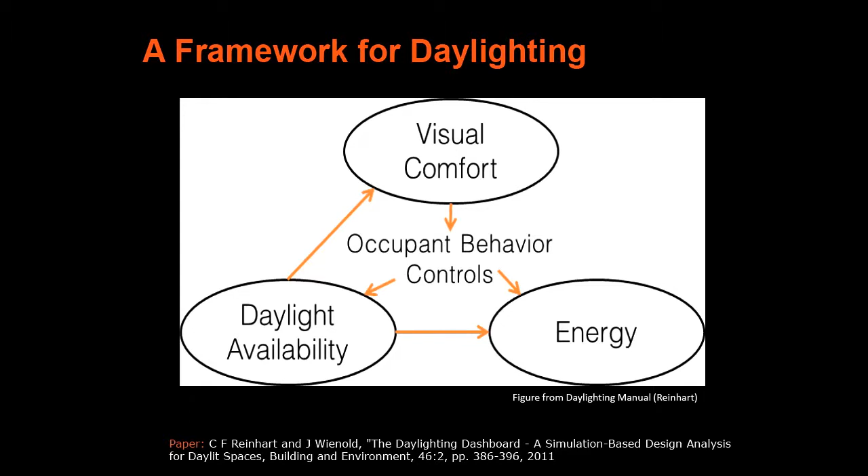So how can this look? Well, there are various levels of how this can happen.

There's manual control—this is obviously the European solution: opening and closing windows, turning on the lights, changing the shading systems. High occupant satisfaction if it works, but very difficult to model.

Then you can have automated blinds—we were in the epitome of the automated building last time. Basically every single blind seems to adjust independently depending on direct sunlight shining on the window, and it seems to work, believe it or not—only in Switzerland.

And then you have architectural control. This is, of course, great—buildings like the New York Public Library, where there are no external controls, and still people are really constrained.

Once you're in a library, you sit at your workplace and can't really move. They manage, with these big windows on both sides, never to let the lighting into the space become disruptive. It's a wonderful example that's architecturally inspiring.

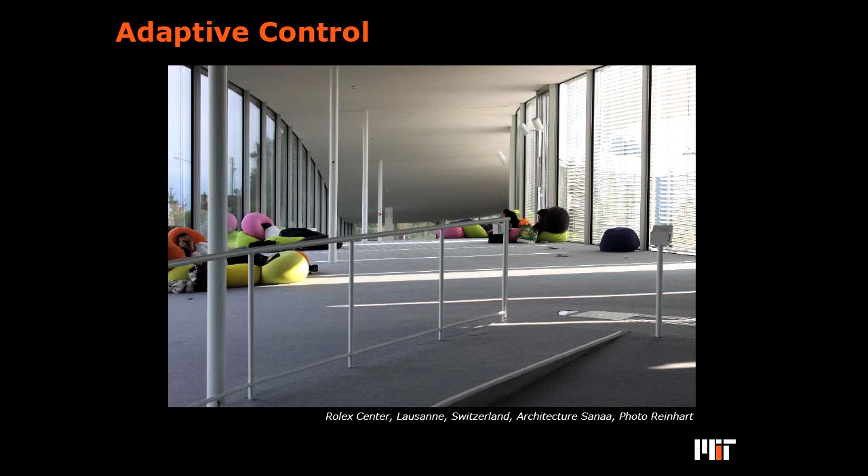Then there's the other extreme—again back to Switzerland—where we take out the walls, take out the furniture, everybody gets a beanbag, and you pick your spot to sit and work, and that works too.

So when you want to put this into practice, how do you look at daylight availability, glare, and energy? I'll give you a simple example of how we do this.

Say you have a south-facing office and want to decide whether to use blinds or not, or instead of blinds, use more complex controls.

The first thing you can do is run an annual daylight availability map to see how much daylight you have within the space. If I don't have any blinds, then three-quarters of my space is daylit.

If I have blinds, I lose some of that daylight, so the argument would be: no blinds.

But then you run an annual glare analysis and see this temporal map based on daylight glare probability, from the first of January to the end of December, by time of day.

If you don't have blinds with such a big window, most of the year when the sun isn't too high in the sky, people experience glare. So that obviously doesn't work—we need some blinds.

This is really where this type of analysis starts changing design. You see that for half of the year the blinds are closed in a case like this. This basically tells you the story of daylight within the space—you can't see out for most of the year, so the whole big window becomes moot and pointless. This is when you see people changing their designs.

Of course, the last part is once you know what goes on in the space, you can do an energy analysis. Loads are really boring usually, so you look at costs or carbon emissions, depending if you're in the US or Europe.

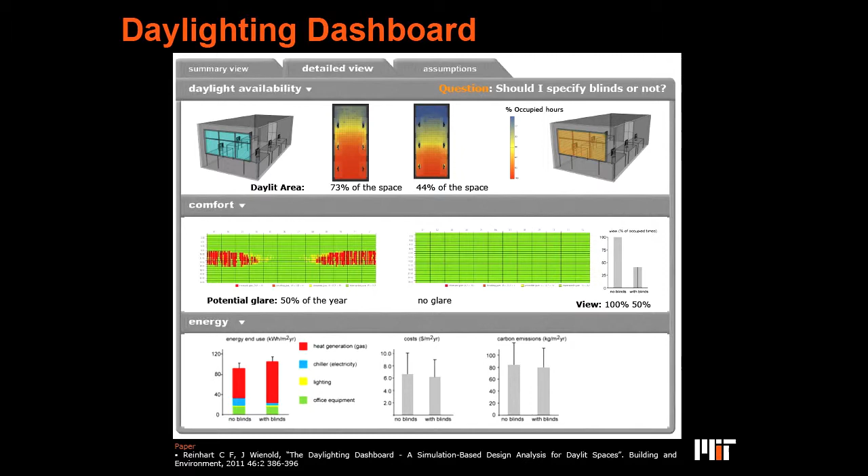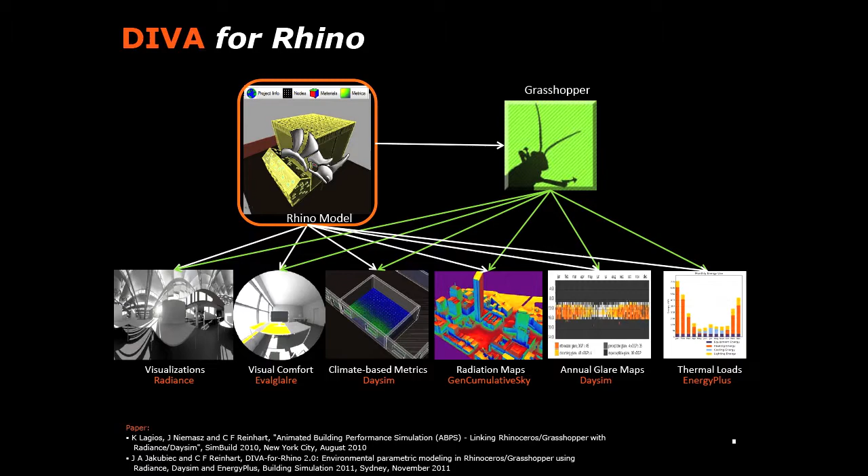The simulation environment we're using for this is a plugin called DIVA for Rhino, and you can use it parametrically as well. As a tie-in to one of the last presentations yesterday, students at MIT in their first year now learn it's very simple to do parametric analysis, link it to Galapagos—a genetic algorithm—and get these very complicated forms, which might be your optimum point.

With this little study—this is Elliot Glassman's work—we wanted to show in how far this deterministic thinking, this idea of 'the optimum way,' actually affects how the buildings look as a result. We wanted to show that this is often really unresolved, how that works.

So we used these boxes and said, okay, I'm optimizing for insulation levels, window-to-wall ratio, and overhang. What's my best solution for cost or for carbon? But then we also changed the climate.

We used today's climate, then climate in 2050, 2080. What you see is that this climate-optimized building changes over time. At the beginning you might have an R40 and a smaller overhang, and that overhang changes over time—your R-value changes as well.

So the main point out of this is it's very difficult for us to decide what is an optimum point, because do I optimize my building for today, or do I optimize it for 2080? But then, of course, I have uncertainty because I don't really know what the climate in 2080 is, and that leads us to different results.

So I think ultimately that shows you still have to have strong design, and you have to decide for yourself. As a designer, you have to say 'I want to optimize for cost,' and be aware of this. There's often this fear that the computer takes over design for you, but this shows there's a high level of arbitrariness in what you actually pick as your performance metric.

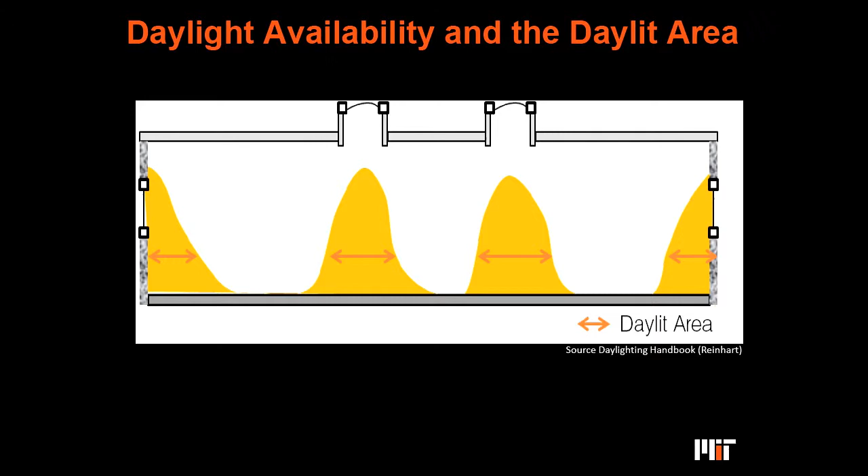So daylight availability—that's a study we've done. Why do you do a daylight simulation? You want to know where the daylit area ends. It's really trivial, of course—my six-year-old son knows that where the opening in the facade is, is where the daylight is—but we want to be able to say, well, this part of the building is daylit and this is not. So how do we make this distinction?

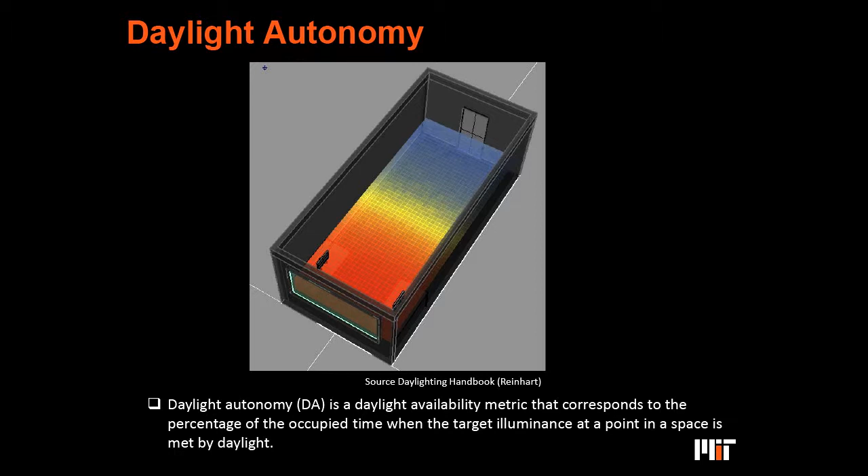Using the metric that Lisa introduced yesterday, an annual daylight availability metric, we can say: what's the percentage of occupied times when I meet a certain level? Depending on what that level is—if you want your target level 90% of the time, or more or less often—you get deeper and deeper into the building.

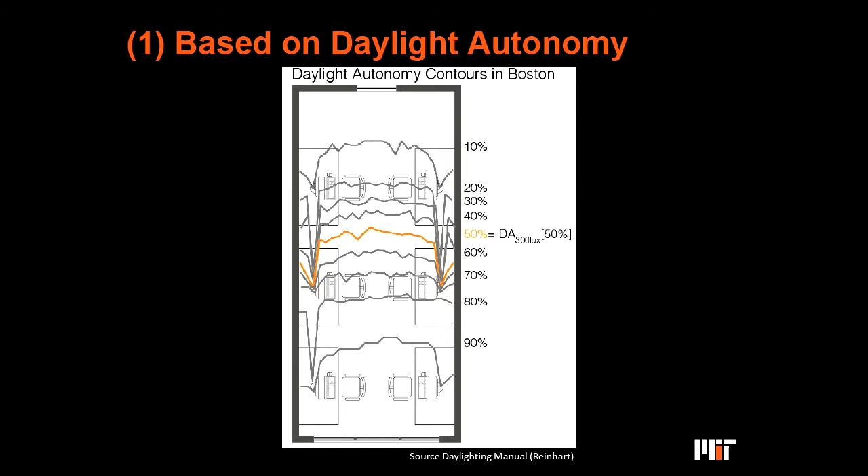Based on matching to 61 spaces, the IESNA committee determined that 50% daylight autonomy would be a good level. So this orange line—now magically the computer tells you, north of it it's non-daylit, here it's daylit. I wanted to see in how far that, what the computer and some daylighting geeks tell us, matches how people actually experience places.

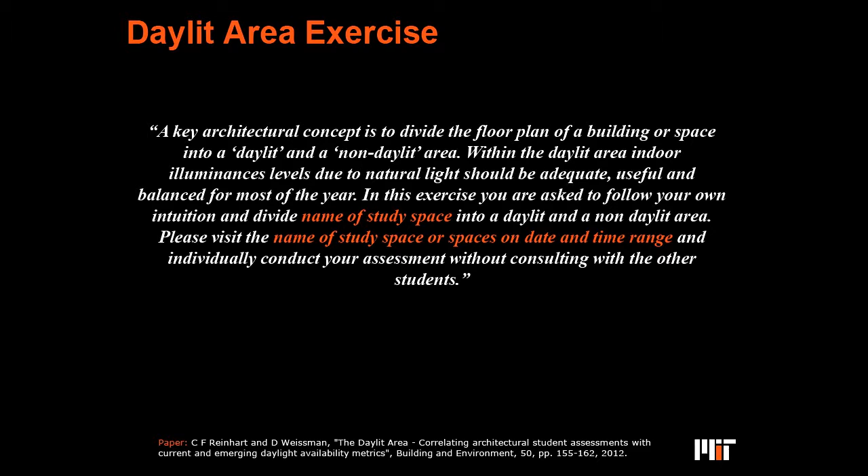So we started first at Harvard to do this little daylight area exercise. It's very simple: for students, before they learn anything about lighting, we take them into a space that's partially daylit, give them a floor plan, and just say, draw the line where you think the daylighting ends. The first time we did that was in the Carpenter Center from Le Corbusier, a north-facing studio space. So everybody got a floor plan here.

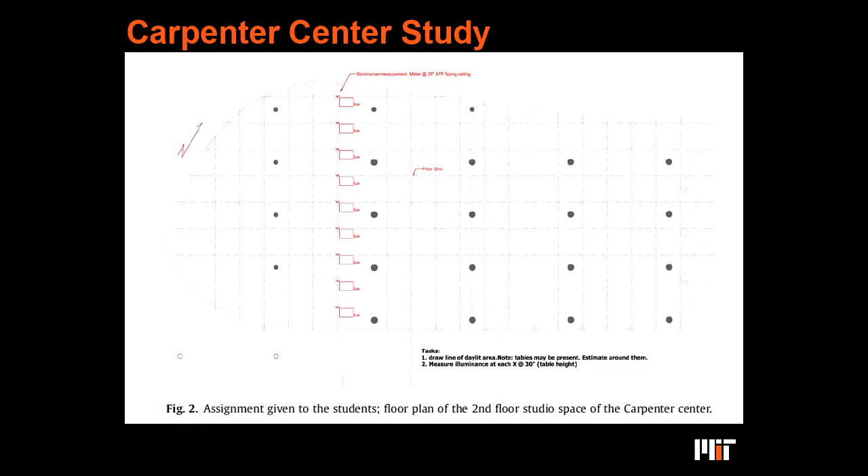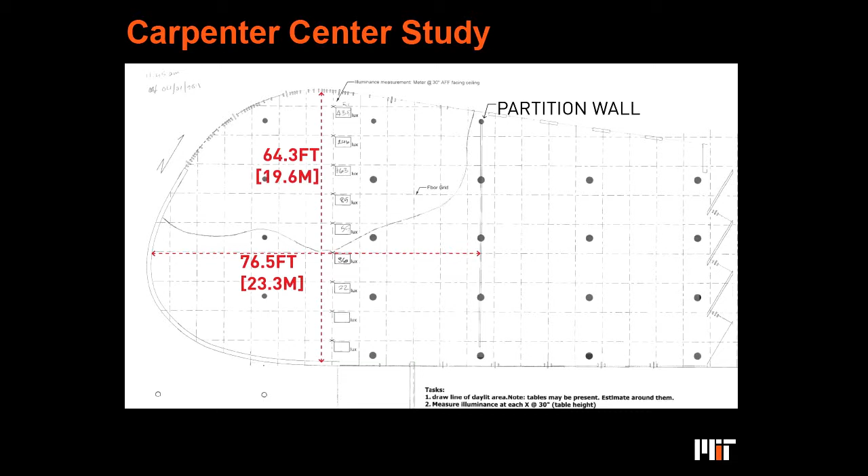Here are the windows, so the light comes in from here, and then the students just draw the line here. So this student drew the line here. If you do that for a lot of students, you get a lot of lines. So this is our mean line, basically, that we say this is what the occupant said, how deep the daylight penetrates.

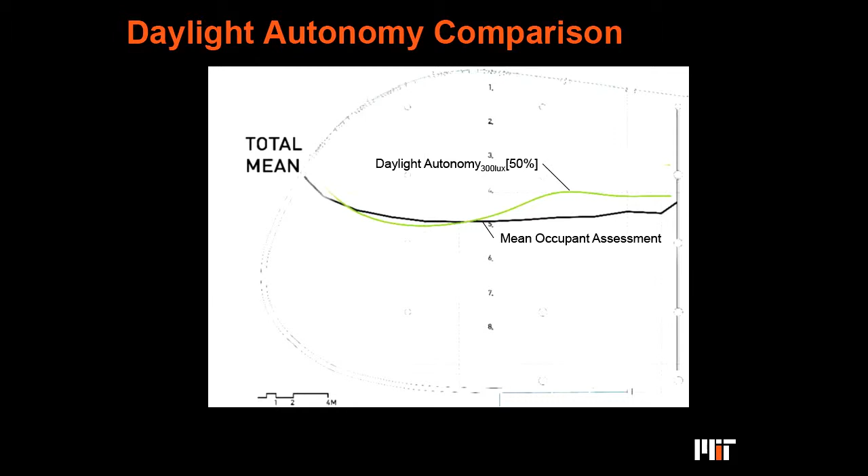And when we compare that to the daylighting metric, we actually got really close. So in this case, we were lucky, so to speak, that IESNA matched very well for one space what we were predicting. So great, quickly write a paper as long as it's still fresh. And so on one hand, we said that's encouraging. On the other hand, I would really say that's surprising this works at all, because we have people looking in the space and they see luminances, yet we do an annual illuminance calculation. It's in a way surprising how that could match at all.

But it worked, nice. So then we tried to do it again. This is our Lorax project. So we worked with several schools of architecture and asked them to repeat the same type of exercise. So they all did this exercise, sent us photos of their spaces, their CAD models, student responses, and so forth.

And these are the schools that participated so far. So we have 12 schools, and we've done most of the simulation, but it's still in process. So this is what we got, some preliminary results.

Well, first where I wanted to go is to say for design, this absolute line I think is a bit disruptive to say daylit, non-daylit. This is really not how we think, since there's a subjective component in there as well.

So instead, we basically said, okay, let's do a voting scheme. If three-quarters of people say for a certain area within a space this is daylit, then this is really daylit. There are always 25% that you can never satisfy. And then there's this transition space. So if one-quarter to three-quarters say it's daylit, then there's some merit to it, and we call that a partially daylit area, and less than 25% is just a lost case.

And now we convert that into daylight autonomy. So this is the IESNA metric for 300 lux, 50%. And here we say, well, if it's 150 lux as a minimum level, this is kind of our transition space. And we wanted to see how well this works.

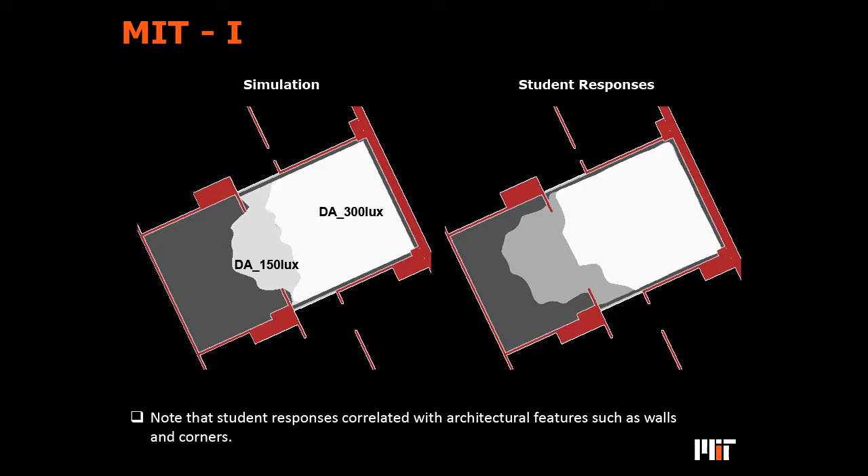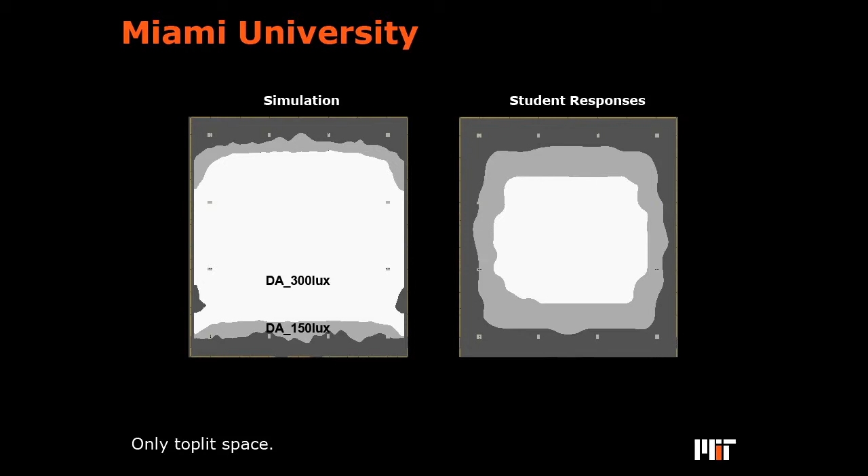This space didn't work well at all. This was in Brazil, Solange Maria Leder worked with us there. It's a circular building, so it's this building here, top floor. And here it really might be that this concept collapses because people stand in the middle and they see the luminances, and they don't really see this illuminance that we are modeling actually.

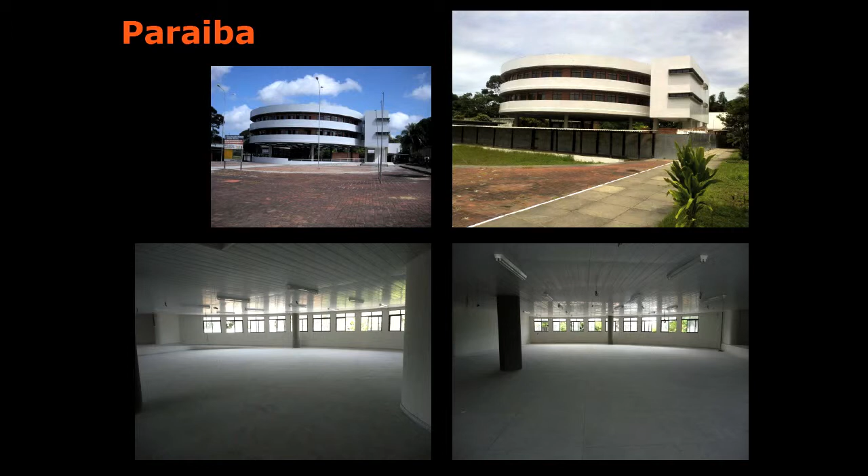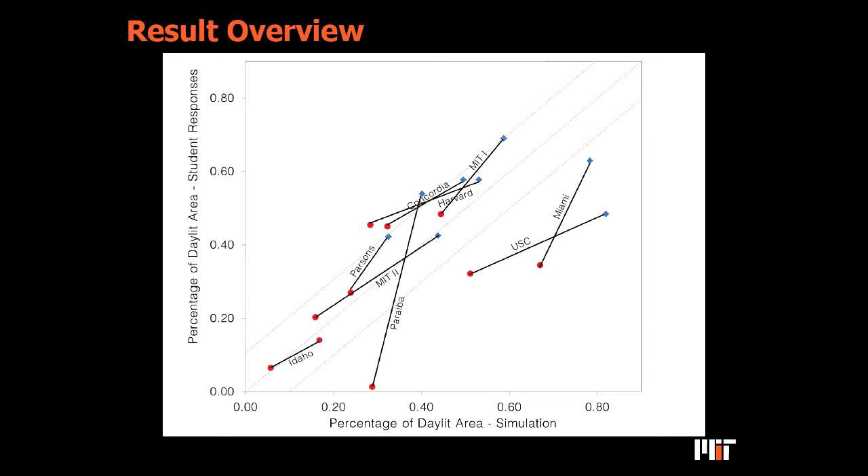But if you look at it, we can actually mostly say within 10% how big the daylit area of the space is. And that's very good, because this is the kind of thing that metric systems might want to have. So we can, within 10%, predict how much of a building will be daylit according to that. So this is where we are with this study so far. I think it's pretty encouraging right now, and it seems promising for a rating system.

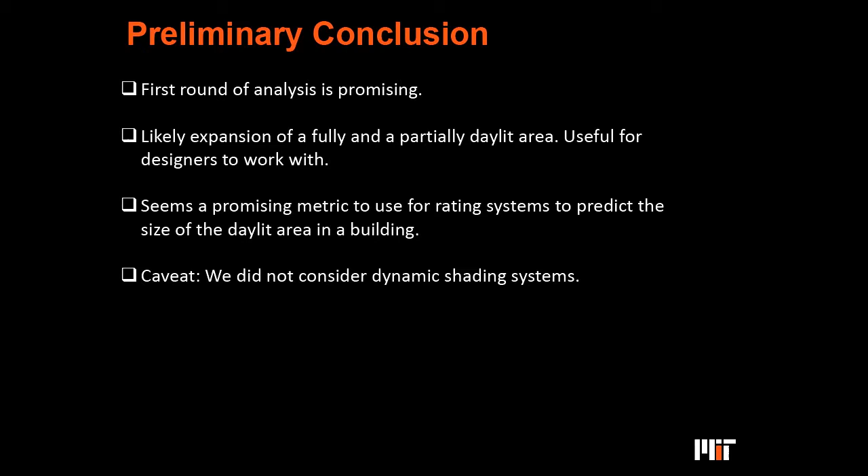As a caveat, we didn't consider dynamic shading systems, but mostly these spaces didn't have any. So a little more on glare analysis, and I rushed through that. So basically, all the researchers know that this is old work from 10 years ago from two people in this room, Jan Wienold and Jens Christoffersen, who introduced this daylight glare probability, which is an algorithm that you run on a scene, either a high dynamic range photograph or a simulation, that predicts the likelihood of people experiencing glare.

The thing to remember, it's based on two concepts. It's based on the idea of vertical eye illuminance, similar to the work of Myriam Aries, so how much light you get in your eye, plus a contrast ratio. So how much contrast do you have within the field of view?

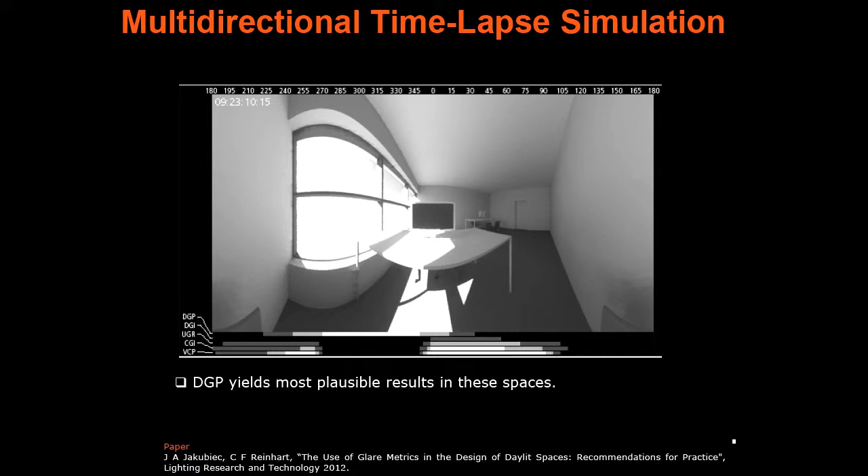So the first thing, we just compared this to all the other metrics that were out there. That's again a little older, where we basically for the side-lit space said, well, depending on which way you look, where do you experience glare? Here we found that daylight glare probability detects the window as the culprit, whereas all the other metrics think the glare's in the corner due to the contrast ratios. So this seems to be the only metric that yields something plausible.

What we did next, because we want to use this concept for simulation practice, we said, well, how do people behave? If you would be in a space like this, if you stoically look forward, then you will experience glare pretty often within a year. But then we said, well, if we allow people to move around, say we have better furniture layout, of course, if you look that way and you experience glare, well, don't look that way, right? That's how we behave in reality.

So once you start introducing this, you see how you can get rid of a lot of glare. So if you look constantly forward in this space, you get glare for most of the year. Once you allow this adaptive freedom, you get glare solved a lot more. So that was the concept.

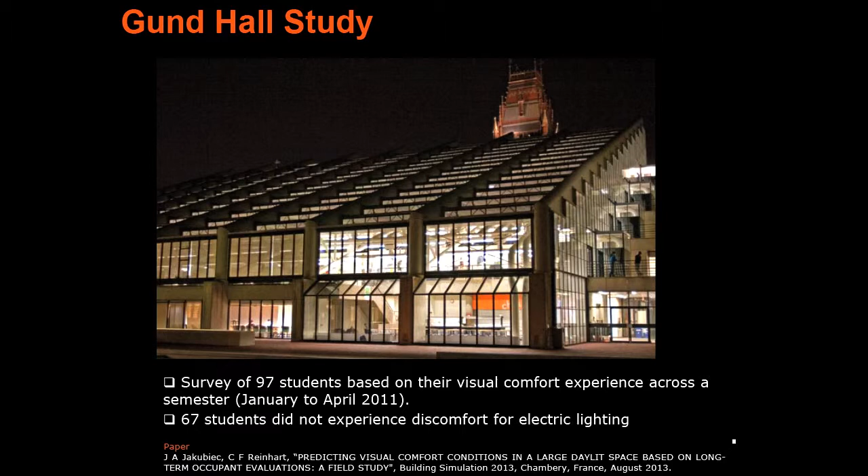5 minutes, oh God. So this was the concept, and what we tried to do then is test it in an actual field study. So we used Gund Hall in 2011, and there are about 500 students that sit on 5 levels in this big glass box, basically. And we promised them coffee in exchange for their opinion of their workspace. And we got 100 responses back, and about 30 of the students had problems with the electric lighting due to glare. We took that out because we didn't want to consider that. So we looked at 67 student responses.

This is our Radiance model of the whole space. So we knew exactly where a student was sitting. So we basically tried to map what students said about their space with simulations. And what we found when we used daylight glare probability annually by itself, that didn't work very well.

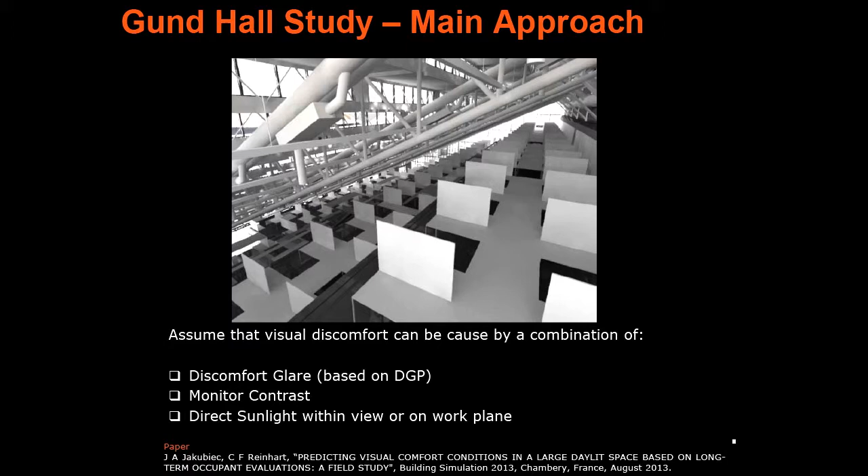So after a while, we said, okay, glare can be multiple things. It can be DGP, discomfort glare. It's monitor contrast, so even if I don't have discomfort glare, if I look at my monitor and can't see, that's a problem obviously as well. And it can be direct sunlight near the workspace. So when we used all 3 of them together, we actually got some good results.

So these are some very cool maps from Alstan Jakubiec, who is a doctoral student at MIT. So here you see the 5 different levels. And wherever it's gray, they're basically overlapping levels. And it's a pretty complicated, rich graph. So the inside color always tells you if a student in the morning, noon, or afternoon said how he felt between comfortable and glary. And then the outside is always our simulation results. So when the colors match, we predicted it right.

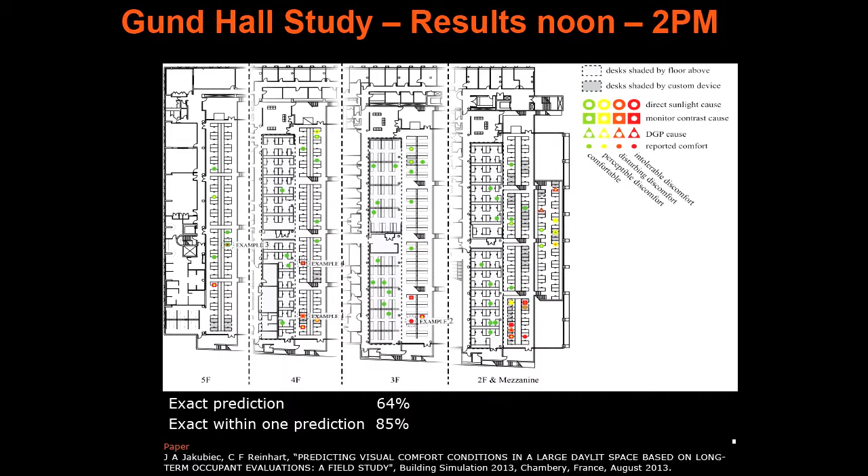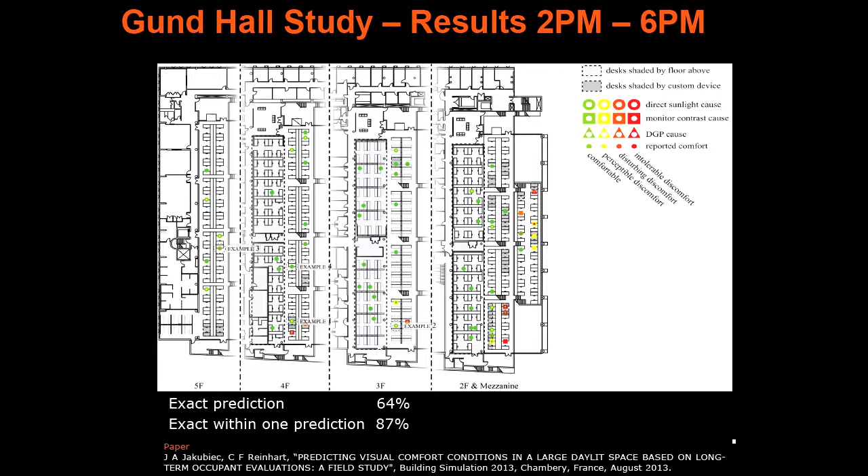And basically, in this case, in the morning, the exact prediction we managed in 40% of the cases. But since there's a big subjective component, we said, well, we are happy enough if we are within 1. If somebody says it's intolerable and we say, well, it's disturbing, that's close enough. So in that case, we would get within 70% of the evaluations. And for the noon case, we get 85% of the results right. And in the afternoon, we get 87% of the results right. So I think this is really a step forward in our ability to predict discomfort glare within spaces.

And that's the last part. I have 3 minutes. So urban modeling, I really wanted to show where we are going next. So we developed basically a DIVA for the city, and you can download that here, urban modeling.

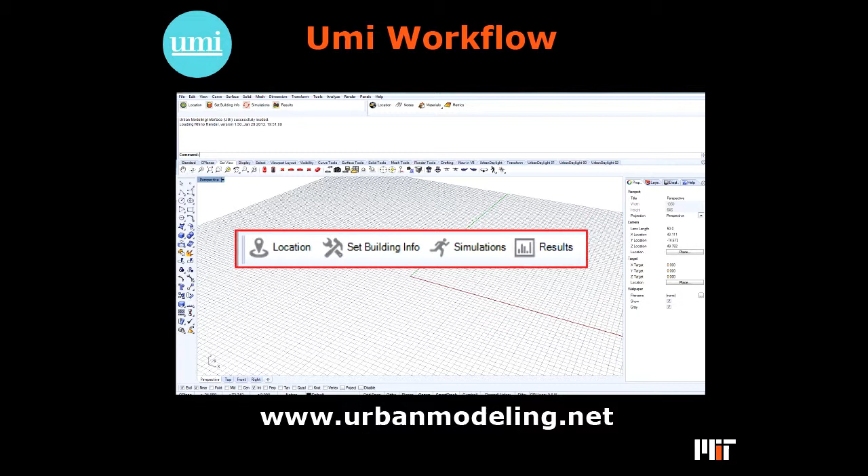We call that Umi. And what it does, it's an urban modeling platform for energy, daylighting, and walkability. So the way it works, you set up a massing model in Rhino with your massing buildings, with trees and a street network. And then we auto-export this into EnergyPlus for thermal analysis, and you get basically these color maps of energy use intensity throughout your city.

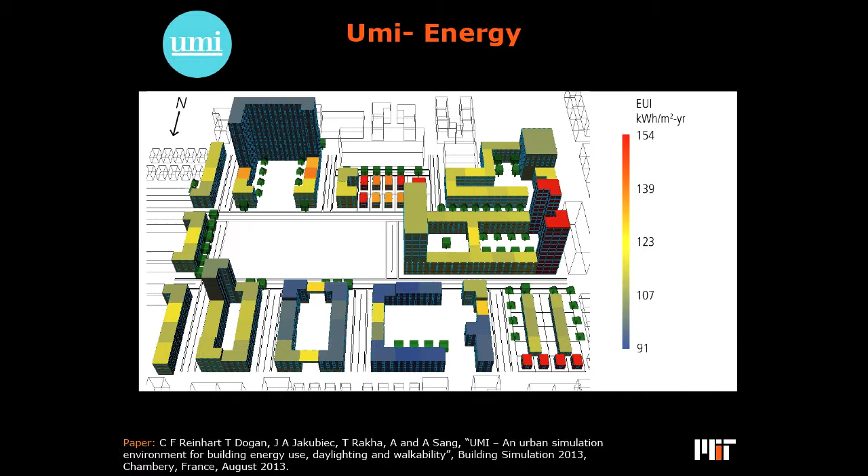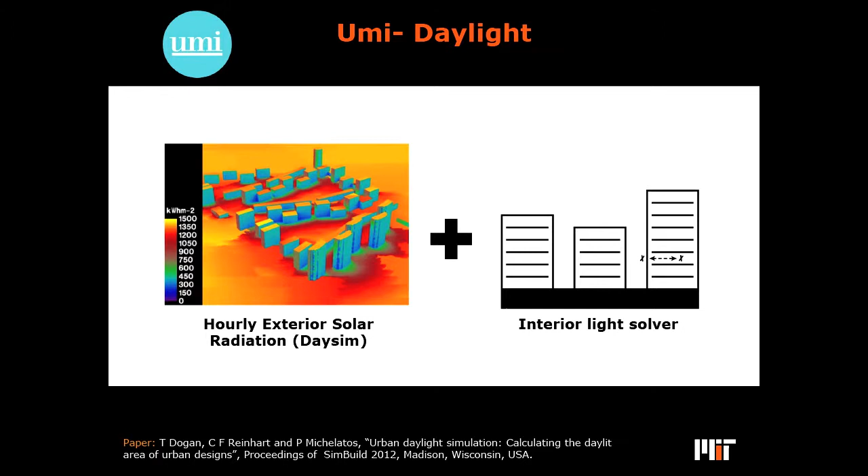The next thing that you can do is, we want to do a daylighting analysis, but we don't want to wait 2 days. So we are basically combining outside DaySim simulations with our own interior light solver. This was done by Timur Dogan, and this was published in this paper last year. So that allows us to do this. We can basically do a climate-based simulation of a whole city in 30 minutes.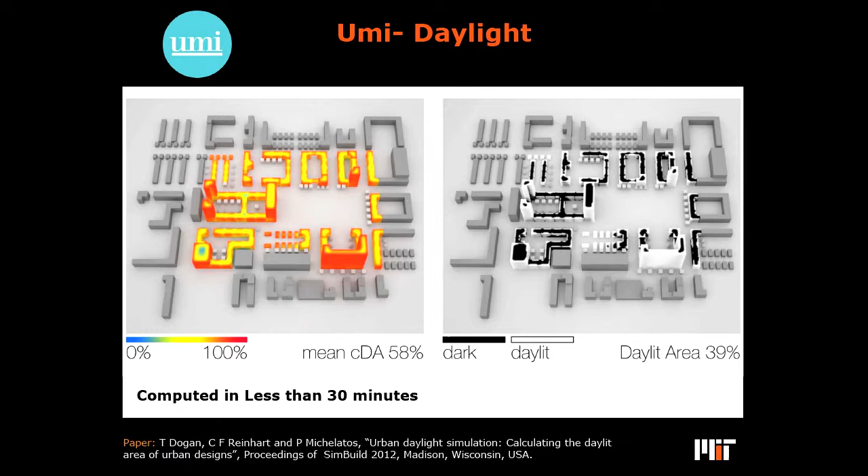So the way this works here, you see continuous daylight autonomy. Here's the IESNA metric. It allows you to very, very quickly basically say what the percentage of your city is that's daylit. And outdoor comfort is something that we're looking into as well. Since we know the temperature and the radiation distribution, we can look at heat spots or cold spots within an environment as well to tell you how to react there.

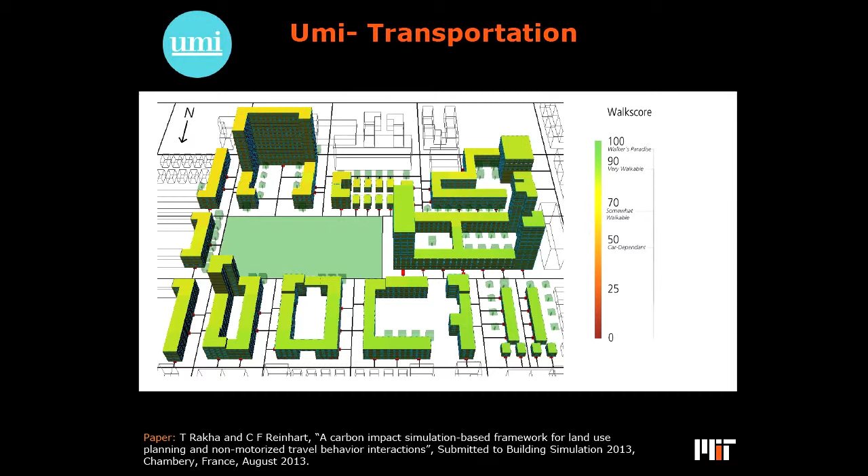Urban transportation, we started off with the walk score that we talked about a little yesterday. So we have these buildings with their usage. We add a street pattern as well as certain amenities, and then we can calculate how walkable the neighborhood is. And we also have our little finance model that was developed with John Macomber from the Harvard Business School. So it's a first order money in, money out kind of thing for a city.

So of course, with our Rhino model, we have kind of a mini city BIM model, so we can extract construction cost. We can simulate the operational energy use. And this is something that might be interesting to the audience. John is a professor in real estate finance. He basically said, okay, you get a rent, and if it's a daylit space, you probably get a higher rent.

So we basically have these fudge factors in there where you can say, well, how much higher do you think the rent is? And I think that is stronger than productivity, because I think it's always a little lame, these comparisons, because you can get to enormous numbers there, but you don't have really any basis that I've seen. Maybe the next speaker has some better basis, but I think it's very vague. Well, everybody can think about rent. You look at the space, am I going to pay $2,000 instead of $1,500 for that? The market shows you if you're going to pay it or not.

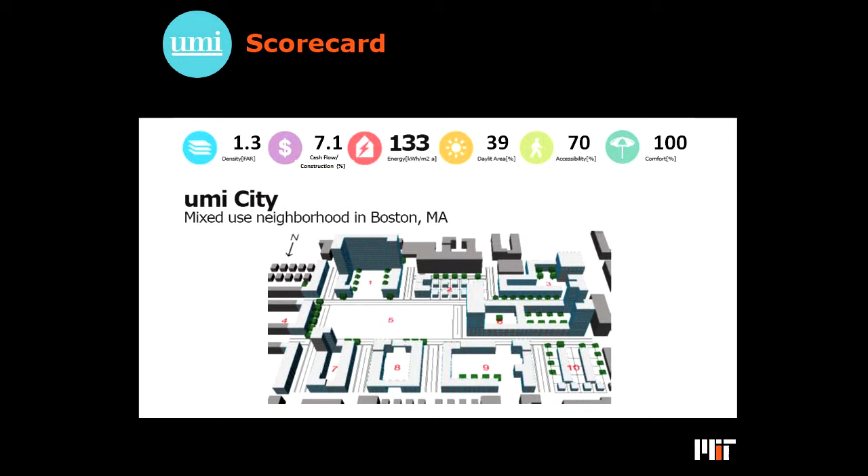So in the end, we get something out of it like a city scorecard. So you automatically get now the density of the city, your cash flow, and this should be 10. So on a good year, you should get 10% of your investment back. Energy use intensity of the city, the daylit area of your city, the walkability of your city, and the comfort indoor and outdoor of your city.

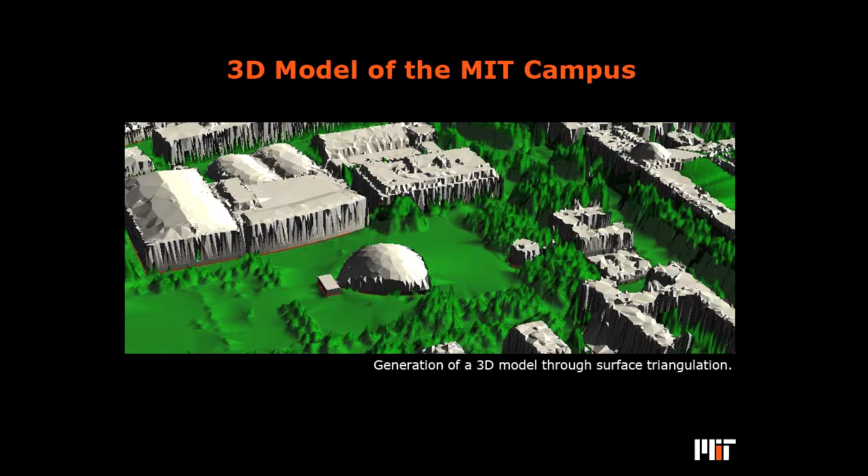And I don't think I'm running out of time. You can go to the Cambridge Solar Map, and we made, I think, the biggest Radiance model that was ever built, 17,000 buildings. So using Radiance, we basically used the city of Cambridge, used LiDAR data to build a whole three-dimensional model of a whole city in Radiance, and then we ran DAYSIM on the whole city to get annual irradiation maps, folded with temperature information for every hour of the year.

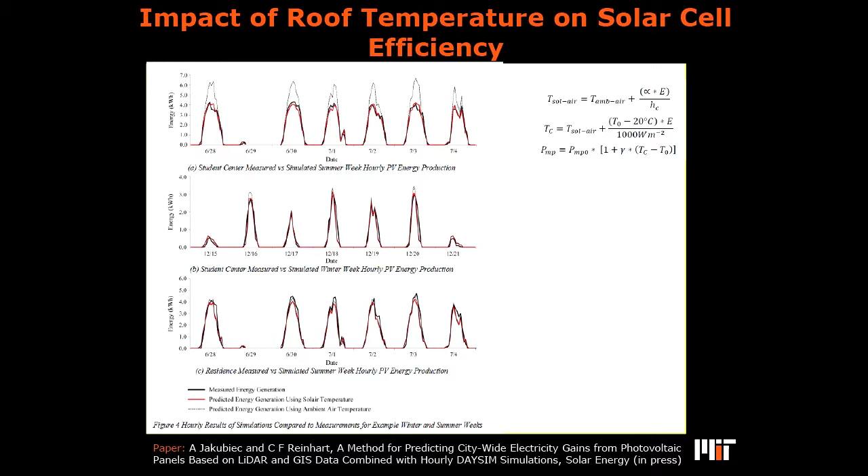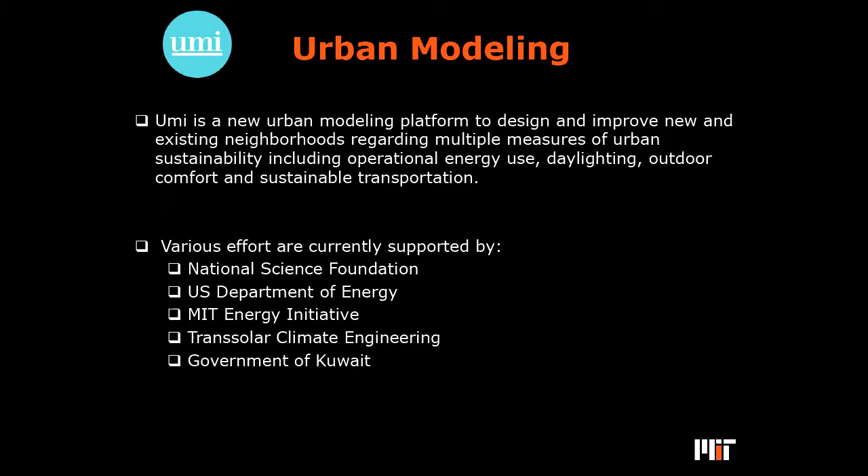So based on the composition of the roof, we know how hot the roof gets. That allows us to say the efficiency of the solar cell, which allows us then basically, for every house in Cambridge right now, if you Google the address, it gives you an analysis of efficiencies. And that is my last slide.

So summary, I think the daylight autonomy metric as currently promoted by the IESNA is something that can be recommended for rating systems. I think it's definitely something that the Europeans should consider because the simulations are pretty simple, and as Lisa said, there are a number of tools that can do this kind of analysis.

I think successful glare analysis will require us to run a series of parallel simulation comfort tests at the same time. So contrast ratios, no sunlight near the workspace, DGP, all have to be considered at the same time, because one is obviously not enough already. And then we obviously see daylighting analysis expanding to the urban realm.